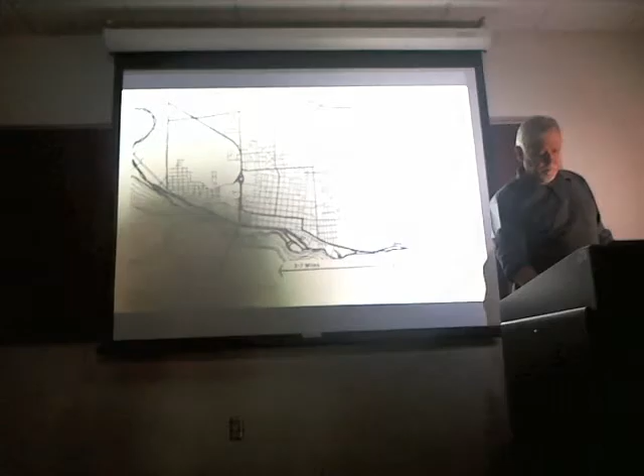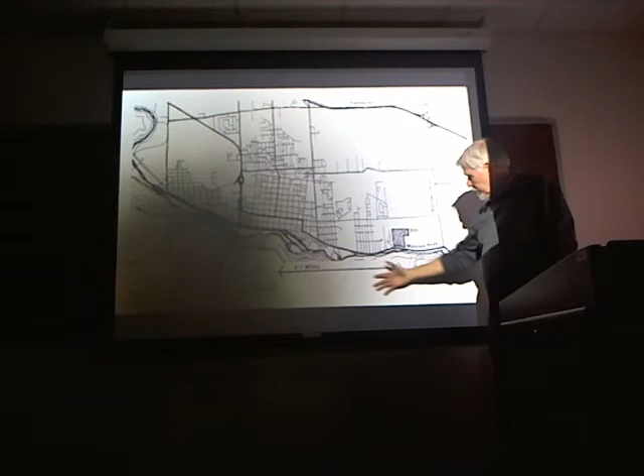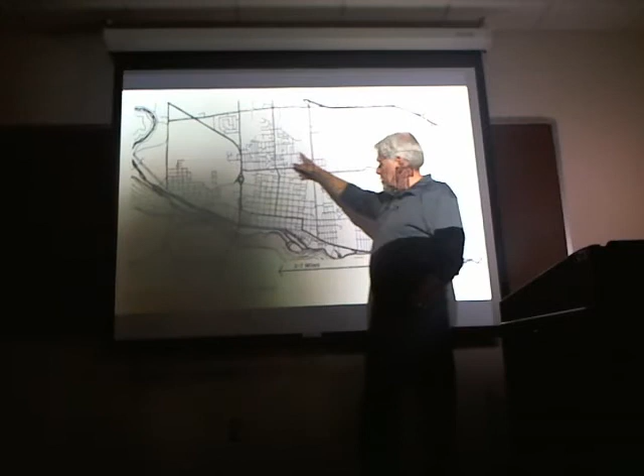So here's a map. Here's the site over here. Highway 401, the main Trans-Canada highway, which is sort of like I-10. There's the St. Lawrence Seaway down here. The main part of the town is over here, and this is one of the suburbs next to the town. But you can see how small the town is — it's sort of like Quincy or something like that.

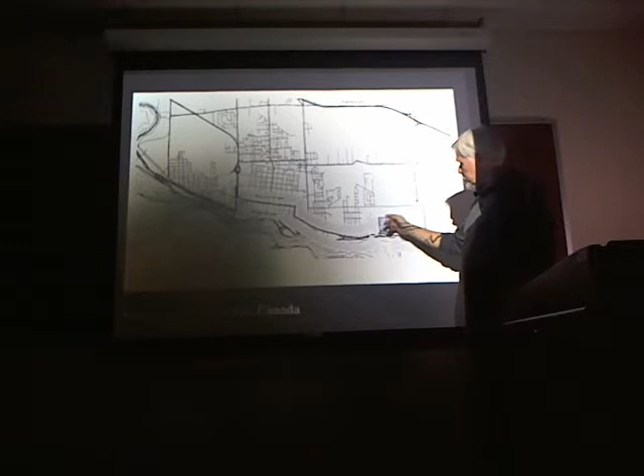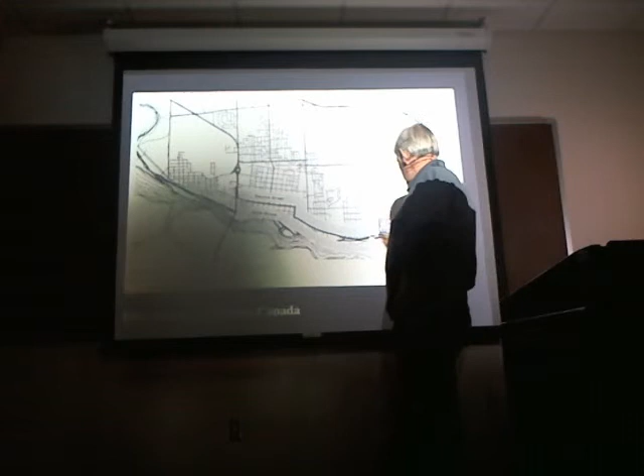So the roads — there was pretty good access to this. There's this road here, which when you come off the highway, you can come in through the center of town and then down these streets to get to the site. This road here was almost a dirt road, more like a 2-lane road.

So when we were programming the site — and by programming the site I mean collecting all of the information — parts of this might look a lot like site analysis, and it is, in a sense, site analysis. The initial part of this exercise was site analysis.

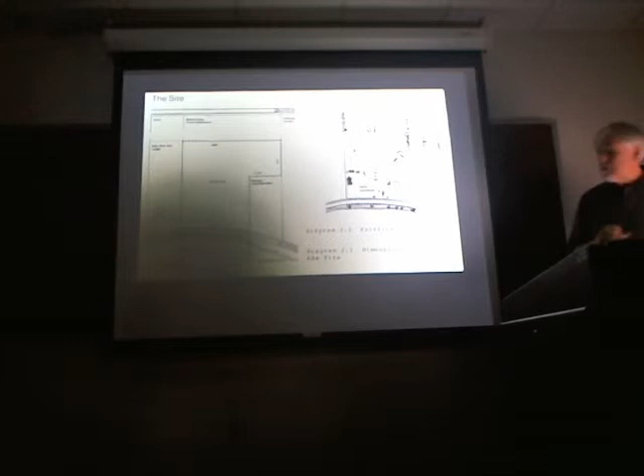So we started to look at things like the dimensions of the site, which you can't really see, but each one of the boundaries has a dimension. Over here is a sewage treatment plant next to the site. And over here is an elderly housing facility — a progressive care facility for people going from active independent living to nursing care — next to the site.

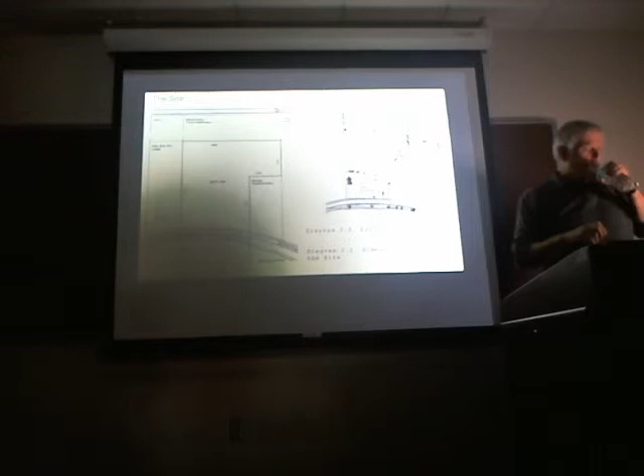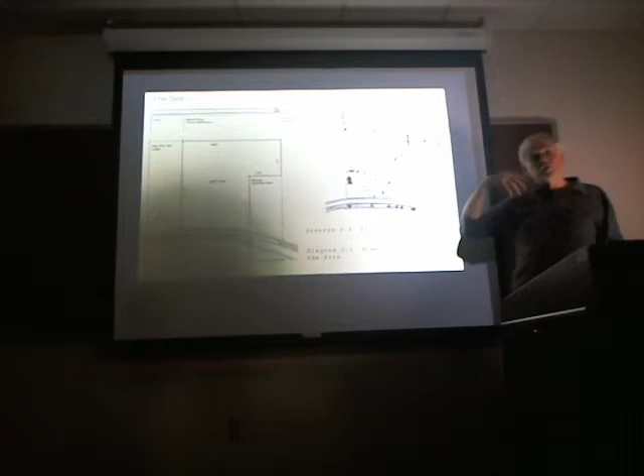This was a farm. Originally, here were the barns, a stone farmhouse, a wood frame farmhouse, and then these were the fields, and these are windbreaks. Particularly out in the prairies, when you see trees like that on a farm, that's to shelter the area from the wind.

So again, I really wish this wasn't wiped out, but these were the various ways you could approach the site. The main one being along here, Montreal Road, called that because it goes to Montreal in this direction. In this direction, if you continued along the St. Lawrence River, you'd end up in Toronto, but it's really not a practical way to go — you're better off going up to the expressway.

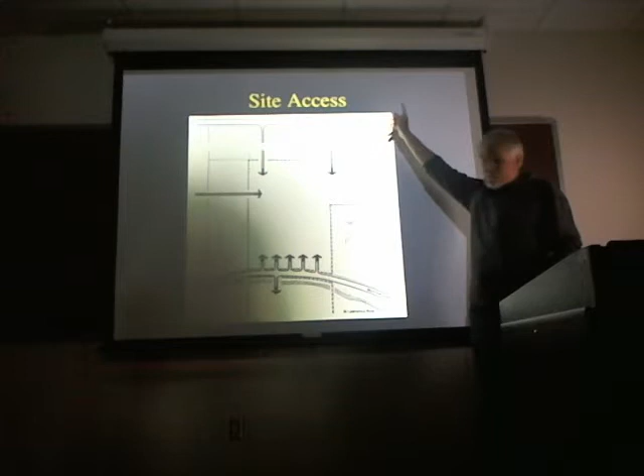The slope, the topography — the river's here with a very, very steep slope right here. Then it flattens out, and there are some gullies here. And of course, we went through all the normal things like looking at wind directions and sun angles and so on.

We had to worry a lot about snow. This is in the snow belt — there's lake effect snow, and you probably hear about Buffalo and Syracuse getting lots of snow. Well, the same thing happens on the north side, Lake Ontario and the St. Lawrence. So you get 4 to 5 feet of snow. Now that doesn't all happen at one time, but it can. And there's a fairly constant breeze — I have to call it a breeze — 6 to 13 miles an hour.

But what it does when it's snowing is cause snow drifts. That's when you get into trouble, because even though you may have only had a foot of snowfall, with enough wind you end up with snow drifts 4 or 5 feet high, depending on the terrain and topography. And the other thing that happens is the snow plows go down the street and pile up the snow on the sides of the street — sometimes you can't find your car. Believe me, I've lived that.

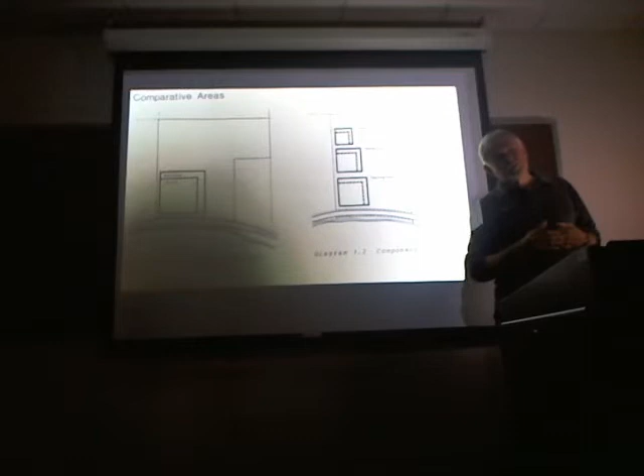And it was based upon that understanding that we began to work with the architect on developing the design. But this was the rational step-by-step process that I'm going to show you now that was used. It's not necessarily one I recommend, because it's sort of like taking programming and directly making it into the building without some sort of intervening major input by the design architect that's, you might consider, creative and outside-the-box thinking.

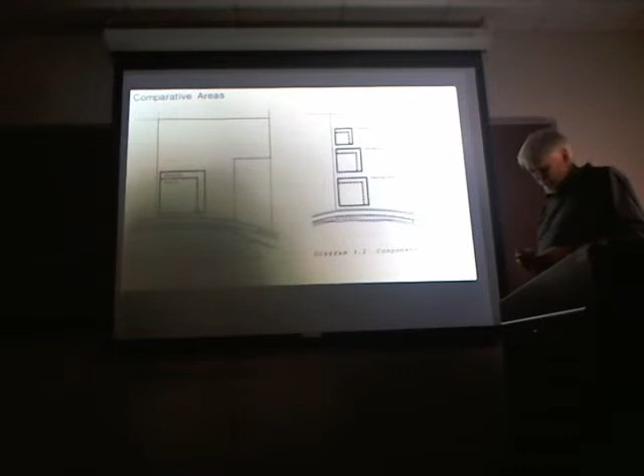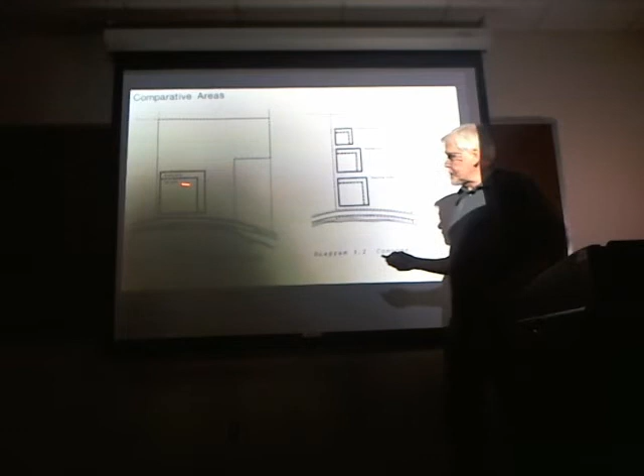So one of the first things we did was we looked at how big is the building footprint, how big are the various components of the program in relationship to the size of the site. In this diagram, what we're doing is we're showing the total building area. So the smaller box is the net programmed area, the usable space, and then this is the gross area, or the additional space taken up by mechanical, wall thickness, and things like that, stairs.

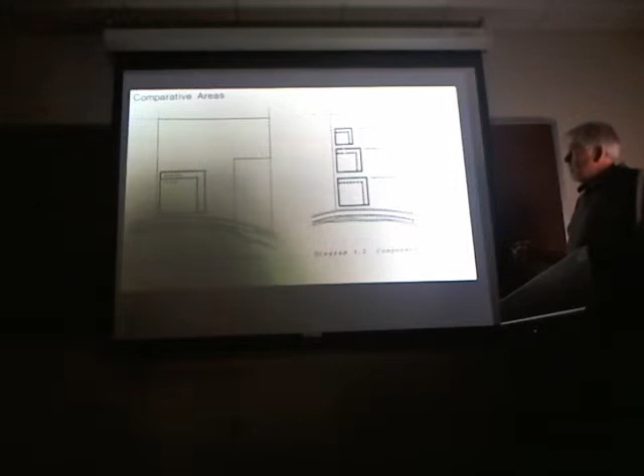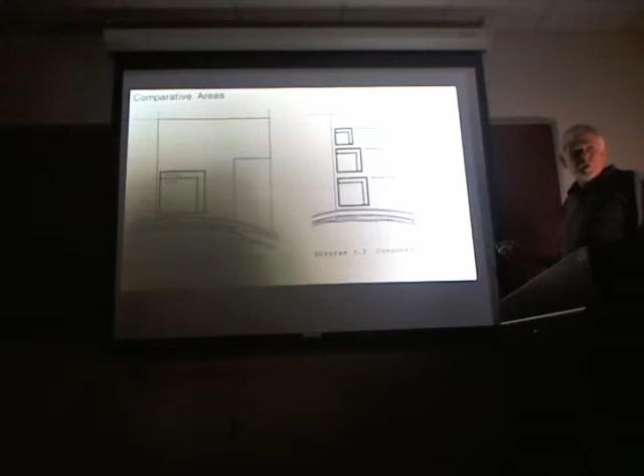And then if you break it down into the 3 main components of the program, there's the teaching areas. Just remember, this is a residential training facility. There's the residential part, and then there's all the common support areas. And this is all sort of the building program components.

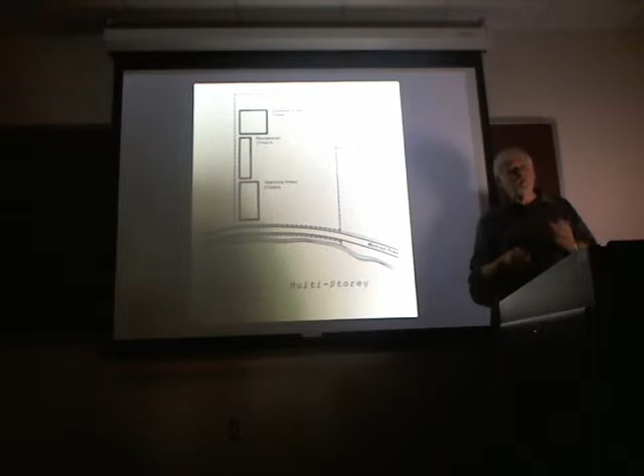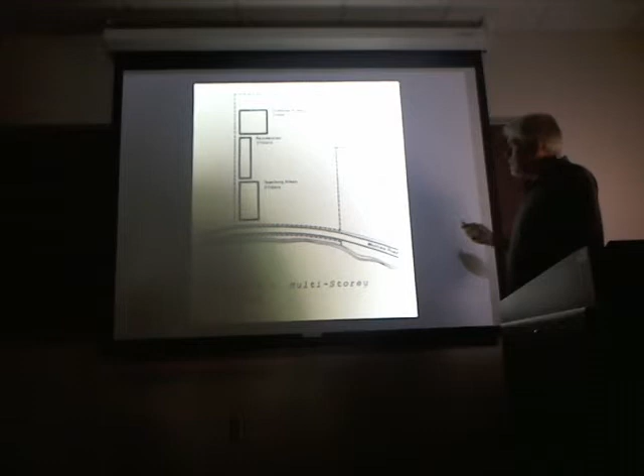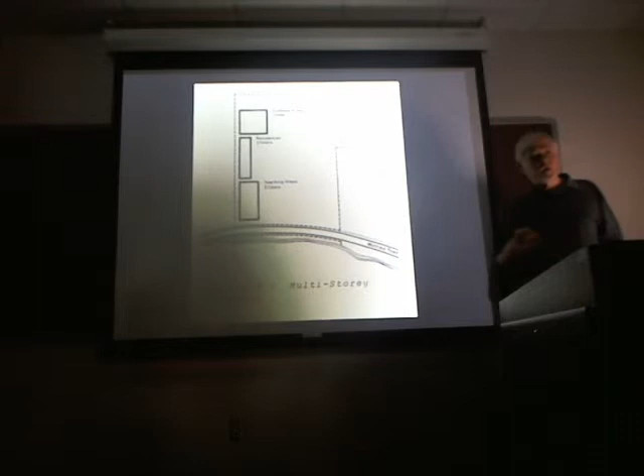Then there's also, we looked at what happens if you take that building footprint and you put it on more than one level. For example, if you do 3 floors of the teaching areas, it becomes this big in relationship to the site. And if you do the residential on 3 floors, and the common areas on 1 floor, which seemed reasonable to have the common areas—things like cafeterias, gymnasiums, and so on. So we're beginning to see how big the site is in relationship to the program.

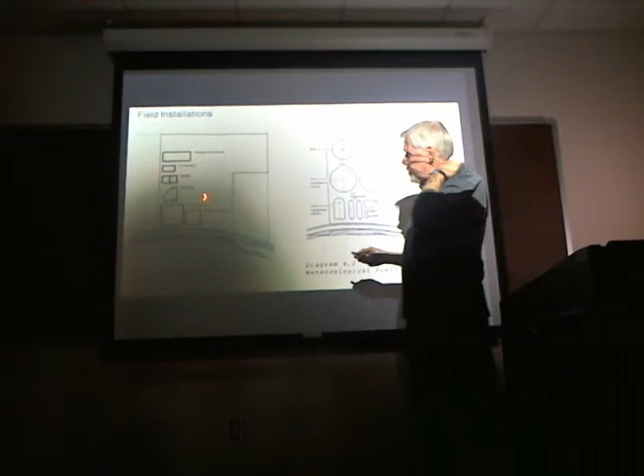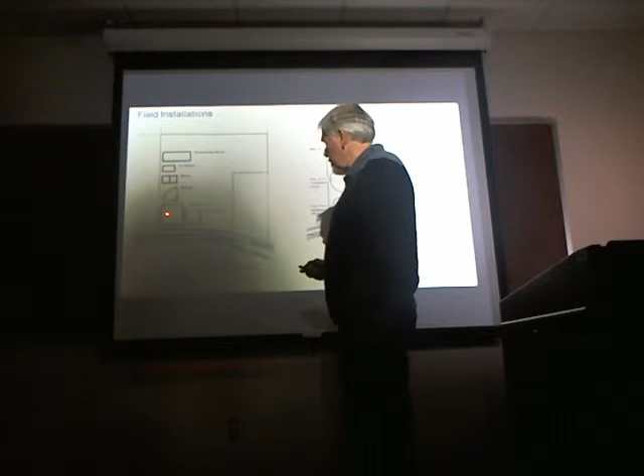Now, there was a significant component of this program that was not in the building but was outside. Part of that is the recreational component. You can't see it very well here, but these are all the different playing fields—football and soccer, ice hockey, tennis, baseball, softball, and so on. Those were things that needed to be there. Oh, and this is parking down here. So that's one type of demand on the site.

But the most important and the biggest demand, and the most difficult—and the reason we're even going through this program and site exercise—is because of all the electronic and meteorological field installations that had to be there for training purposes. They were trying to simulate an airport. So here they are, and these are different radars. This is a VOR, VHF Omnidirectional Range. This is a meteorological observing compound for weather studies. These are instrument landing radars for air traffic control. And these are other types of radars and things that have to be outside.

So if you just glance at the playing fields that are needed, the radar installations that are needed, and remember what the building footprint needs, we started to become very concerned because this almost fills up the entire site.

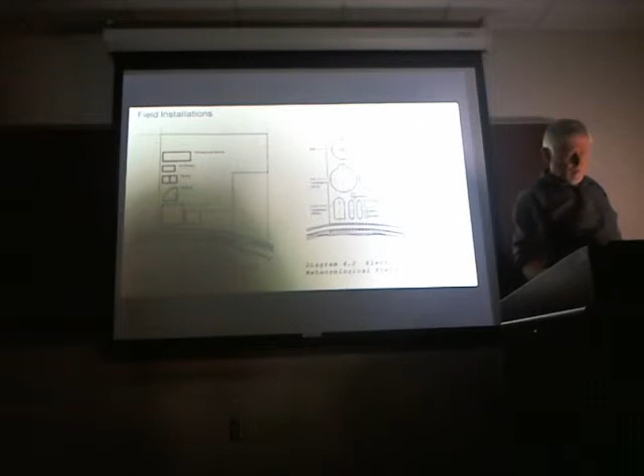The other thing we had to worry about, shown over here, constraints on locating the electronic field installations—people with pacemakers over here. Everybody here probably has a pacemaker. And these radars had large electronic fields from the power lines going to the radars and back into the instruments in the building. So the Department of Health, OSHA, Ontario Health Department, said that we had to be 1,000 feet away from anywhere these elderly people with pacemakers would be wandering. And some of them had Alzheimer's, so they might even be back in the corner.

So now we've got only this part of the site where we can actually put electronic instruments that had high voltage facilities. This is where the actual heavy teaching labs were most suitable, and the field installations could be back here, depending on how the cabling is running.

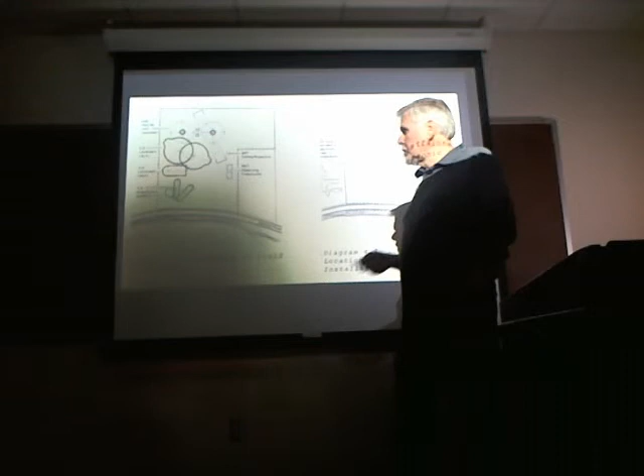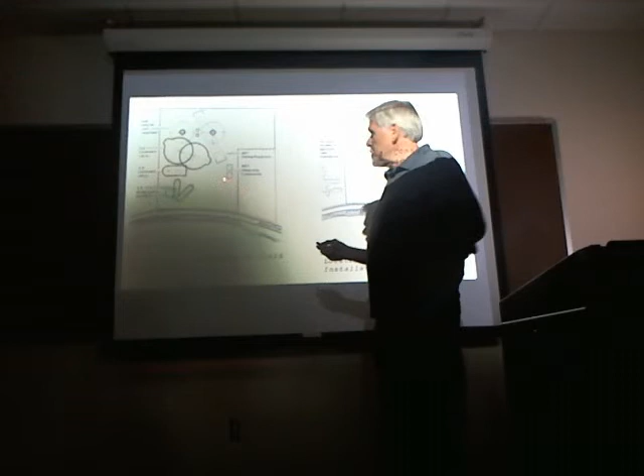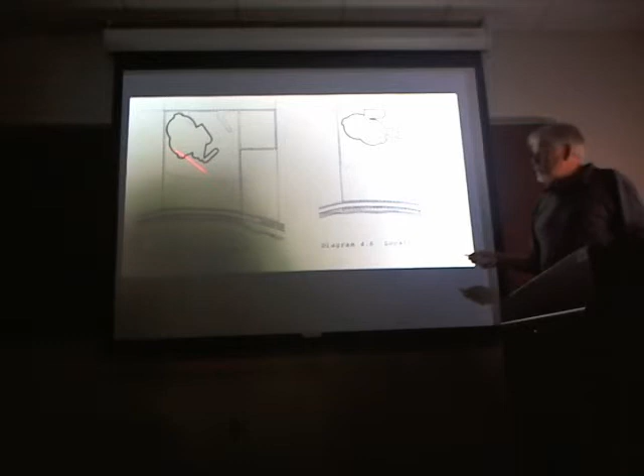We also began to work with the technicians in figuring out what overlaps could occur in these field installations, because we realized it's just not going to work if we didn't do something like that. So it was determined that these two radars could overlap here, the weather monitoring facilities could overlap with this radar, and so on. So there was some efficiency that we could achieve by doing that. That created the outline for the radar installations, for the field installations.

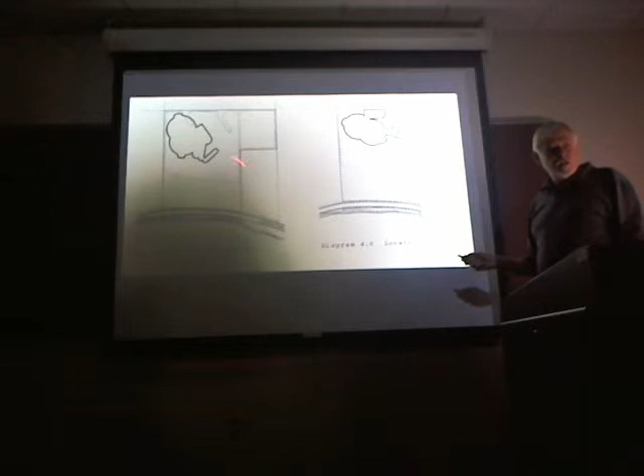And then it became an exercise in trying to figure out what's the best place to put that kills fewer of the elderly people, that is not in the middle of the sewage plant. So we tucked it over there, we tucked it up here.

Then we realized we better get it as far away from this corner, so we stuck it way back, as far back as we could. So this became the location, and there was a certain distance the actual equipment and teaching labs had to be from the field installations - they couldn't be too far away.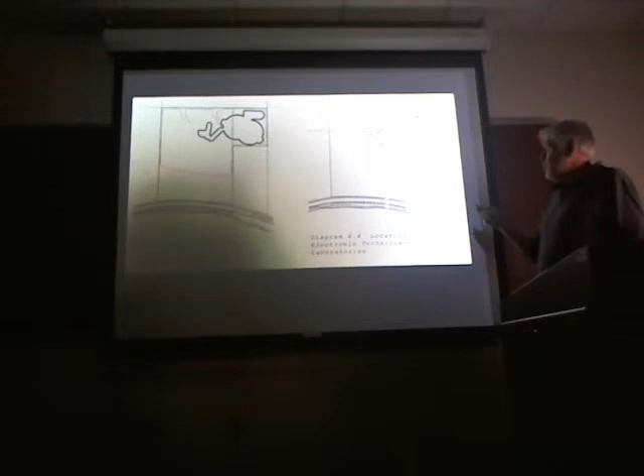So then we switched over and started looking at the building again. The teaching areas - we looked at how we can cluster them and nest them in different ways, because we were tight on the site. The site was a real challenge, and there had been a commitment to that site. At this point, we were still questioning whether the government shouldn't try to get out of that commitment.

So this was one way of moving the components around. This was another way. Just conceptually, how do you begin to work with the major programming elements in this coarse grain program?

We also looked at what happens with future expansion, because in addition to the program we developed, there was always this issue of the facility needing to expand in the future. That was a major part of the considerations in the coarse grain program - what areas needed to expand and how much accommodation should be made in the design for that expansion to occur.

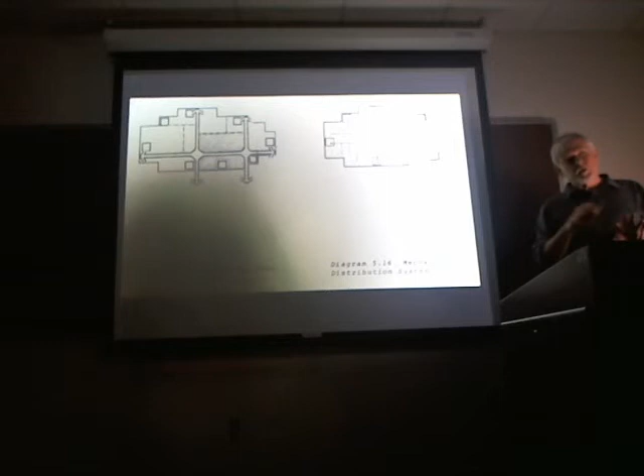So then, okay, let's see what happens if we rough in the gross programmed areas, and they began to fit into this infrastructure, this system. Then we looked at the mechanical nodes and how the distribution patterns work within that. The outside configuration of this was simply nesting all of the programmed areas in without worrying about the configuration of the building as a whole, but worrying about how it functioned internally in terms of movement and so on.

So that really became the starting point for the conceptual direction for the building. Then there was the residential component, which was also a pretty important piece of the puzzle.

The decision was made to break the residential component down into small pieces. We actually consulted a social psychologist on this, who was well known for thinking about how large a group provides the optimum amount of social interaction within a residential component.

So what is too many bedrooms and what is too few bedrooms to create the kind of positive interaction, because these people didn't know each other when they arrived on site and they're only there for a relatively short time. So we wanted that to be an aspect of the thing.

It was determined that a group of 8 rooms was ideal, and they would share a living room and certain facilities.

We also looked at what you could have in terms of vertical relationships and vertical circulation, and it turned out that 4 levels seemed to be optimum. We didn't want to get up too high, but because of the site constraints with the size of the site, we had to be fairly efficient with that.

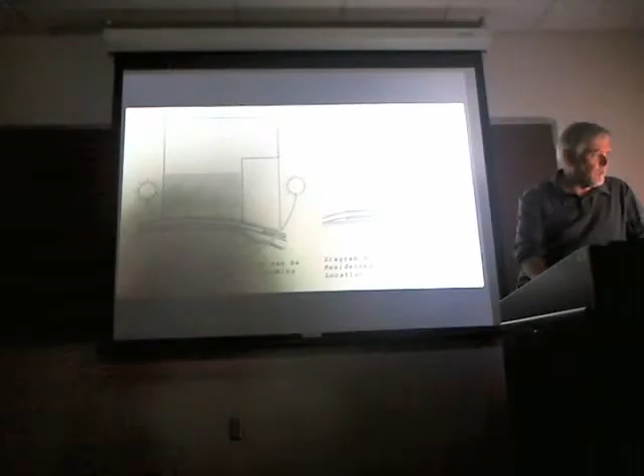In looking at the residential component, we really wanted to take advantage of the river, because it's a beautiful river, and with the slope there was a fantastic view. So it was decided to place the residential on the hill.

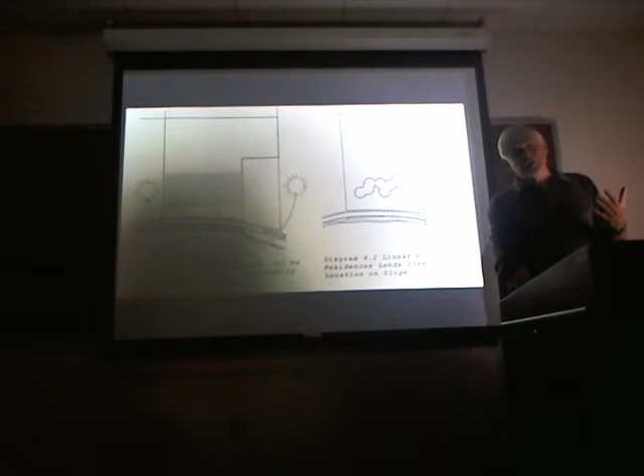This worked okay because it was a series of small pieces rather than one big building, and it could march down the hill and take advantage of the view. Also, the south exposure was great because this is Canada. In the wintertime in particular, you want as much sun and warmth coming in as you can get.

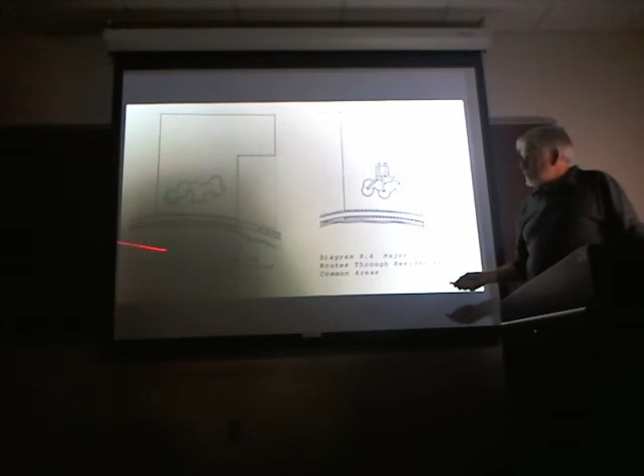We had to look at growth and expansion. What you can't see here is there is a deliberate effort to design this so that if they needed to add, the wings could grow in this direction, adding more rooms. And the circulation, again.

Then we switched from the residential to the training building and looked at ways you could configure that. In this case, having 3 wings with a shared sort of node.

In this case, running the building north-south and putting it in relationship to this so that this becomes the common area.

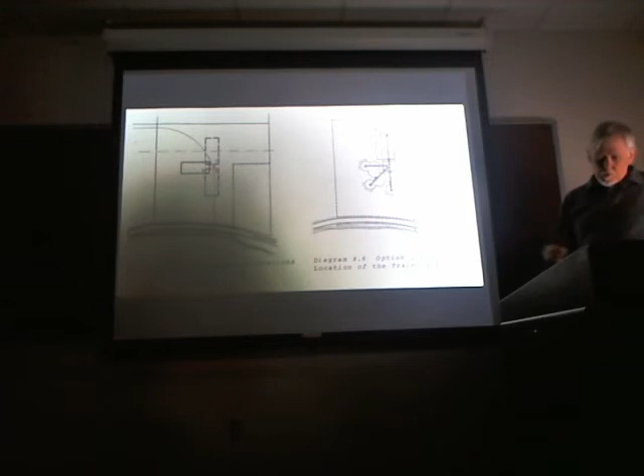Another option here, moving it further down the site, closer to the river, closer to the road. You don't even really see the road because of the slope. If you're up here, you're more conscious of the river and the view of the water.

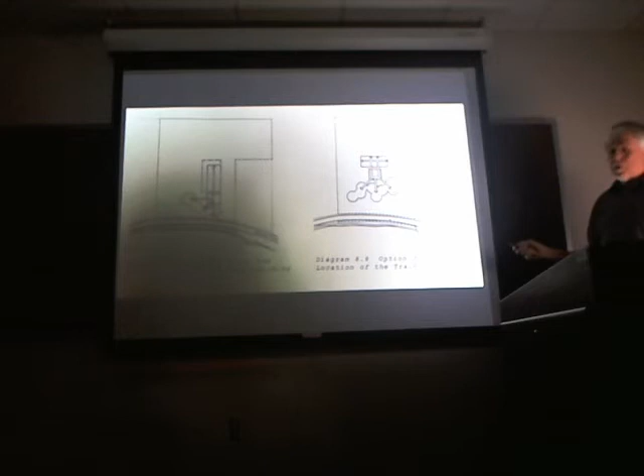And so the final decision was to run the training building east-west and put the service support common areas in the middle like this.

Again, expansion was a concern, so the building could expand in this direction to the north, and the residences could expand to the south.

Again, in the program, it talked about courtyards and social, informal interaction in the common areas and so on. And that's what this is showing, having the common areas working around the courtyard space.

Circulation: how do you get from here to here, all the different options. We want there to be alternatives. You could skirt around the outside and avoid people if you're feeling antisocial, or you could walk through and interact with people that you see there.

We also had to think about where the main entrance was and how people approach it. It was decided that the west side of the building would be the main entrance. It could have just as easily been over here, but that's the sewage plant, and it had a slight bit of an odor. So we found it was better to come in next to the facility for the elderly.

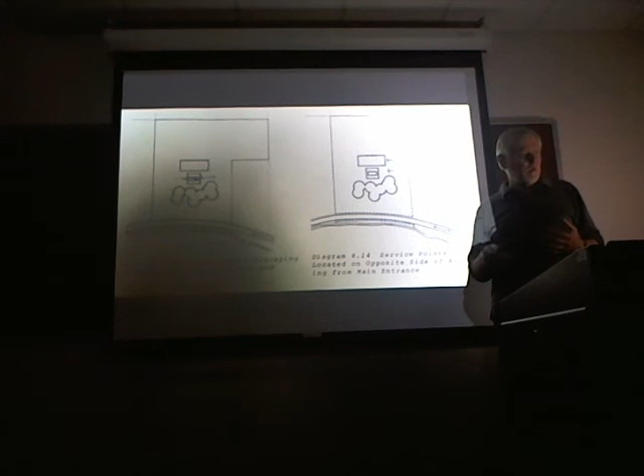In addition to where the public and the students coming for training would enter, we had to worry a lot about service vehicles—there was a lot of service components. So the entrance is over here, and the service area is back here.

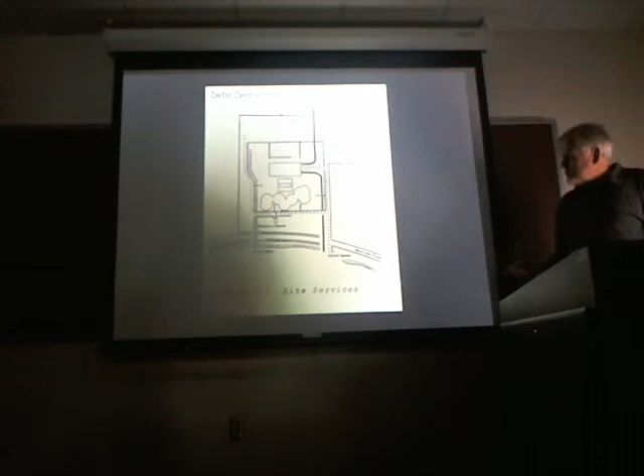This looks at what services were available on the site and what needed to be added to run this place—gas lines, electric lines, sewer lines, water, and so on. These are the fire hydrant locations; some existing, some had to be added.

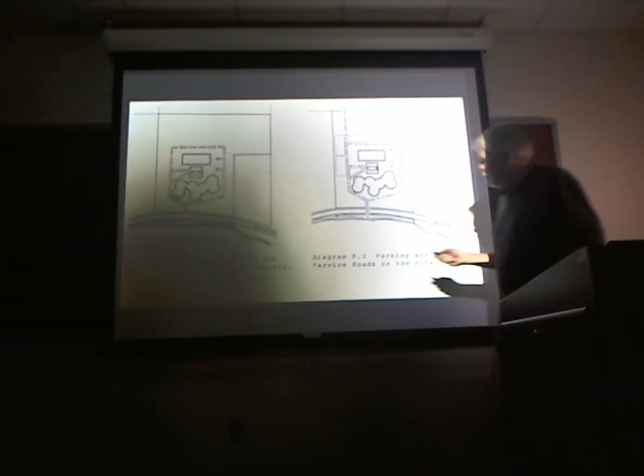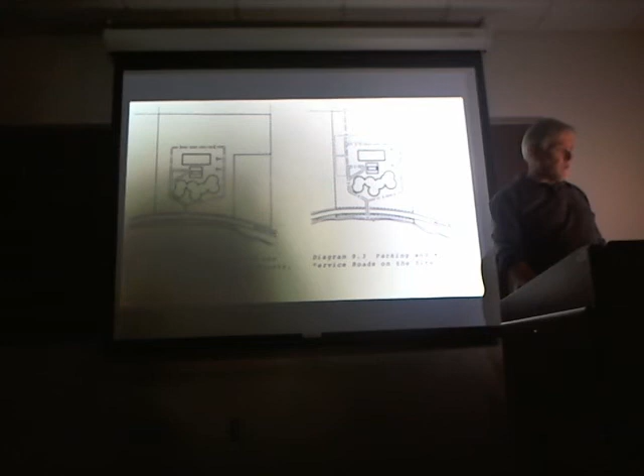So the roads—you can see it better here. This became the road pattern: you come in the main entrance here. If you're a service vehicle, you go off to the right; if you're a visitor or someone staying there, you go off to the left. There's a loop and a parking lot, so you come in the entrance or park here. You can also come in the back door, but that's not preferred. The idea is that there would be a main gate, main entrance, and these other entrances were there for convenience and in case you needed to evacuate the site.

The playing fields became a challenge because they received third priority after the radars and the buildings, so they had to be fit in wherever possible. They ended up being piecemeal, located in different spots. And these are the radars, here's the residential, the training, and parking.

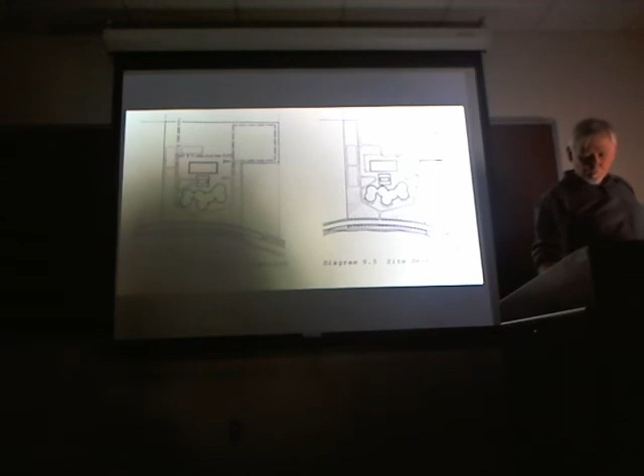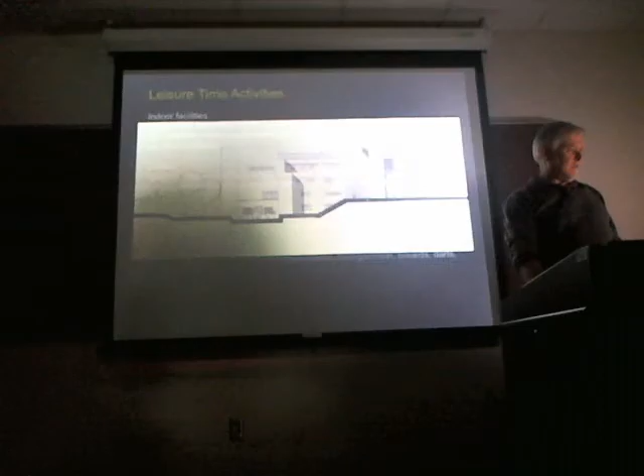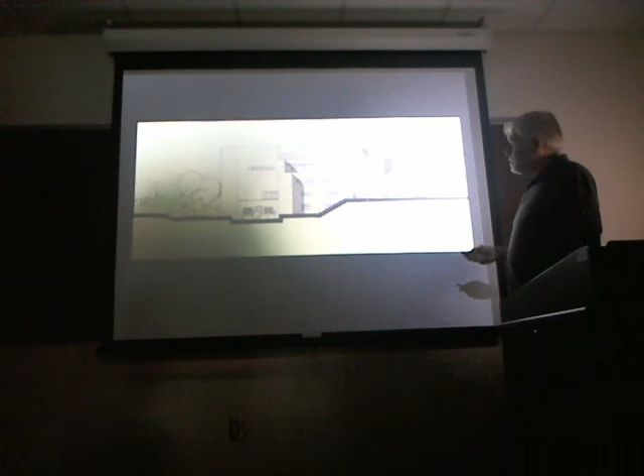So I just thought I'd show you some images of the building that was designed. You can see it's a building designed from a functionalist perspective using a program, because every element of the program is revealed in a straightforward, logical, rational, clean, modernist way—like the stairwells—you can almost tell what different things are just by looking.

And this is the interior main circulation route. Remember that there was that east-west main circulation, and down here, which you can't see at all, is one of the cafeteria lounge areas. So this feels very much like a mall, and that was intentional.

One of the interesting things about this was they ended up using heat pumps, over 100 heat pumps in the building to individually control all the labs, because they had such critical requirements, and throughout the building there was such a variety of demands and needs in the different labs.

In those days we had computers that were large. You probably saw, like in 2001: A Space Odyssey, large banks of computers filling a room like this, throwing out a whole bunch of heat and needing to be cooled constantly. So there was very high cooling demand on some parts of the building, while other parts at the same time required heating because it was wintertime and so on.

So a lot of the system was designed to be as flexible and as efficient as possible. We didn't go to any centralized systems - it's all decentralized.